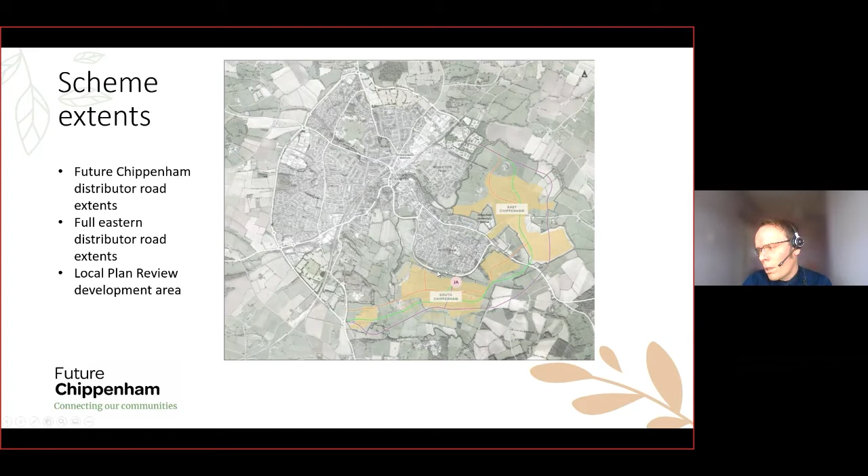The options assessment process is shown on this slide. At the first stage, during the HIF bid, we undertook an options assessment looking at ways of unlocking and enabling housing development, and the preferred option from this was the full Eastern Distributor Road.

The second stage, which we're presenting today, is the Future Chippenham Eastern Distributor Road options assessment. It takes forward 3 strategic objectives from the HIF bid: enabling housing development by unlocking land, improving traffic congestion, ensuring the transport network has capacity to accommodate housing growth, and providing good transport connectivity for sustainable transport between new and existing developments.

We've split the route options into 2 option sifts. The first option sift looked at a higher level. We reviewed the options against the strategic objectives and identified significant environmental, physical or land constraints that would make those options undeliverable.

I will present them on the next slide, but we are not consulting on the first sift options - we're consulting on the second sift options. These second sift options are presented for public consultation and are subject to a full options assessment, including a preliminary environmental assessment and option cost estimates.

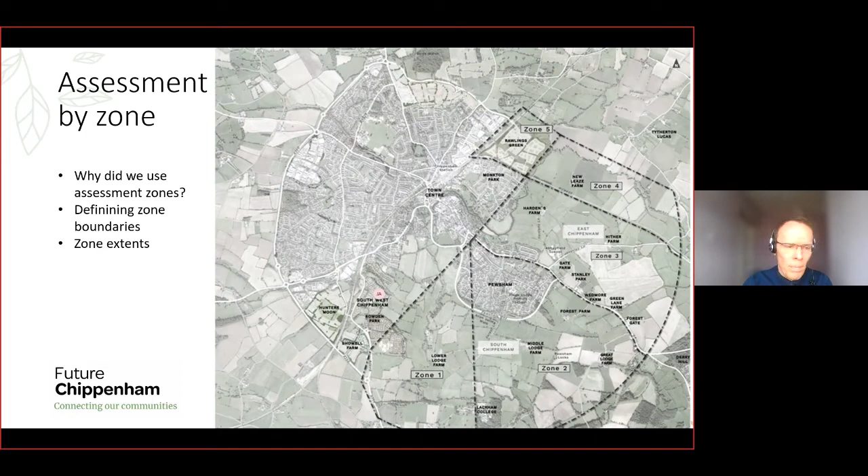Each stage of the sifting process takes forward distributor road routes within each zone, meeting the assessment criteria to pass to the next stage. We've also included options for an additional road linking to Pewsham Way that links up with the distributor road, and these are assessed separately from the zones.

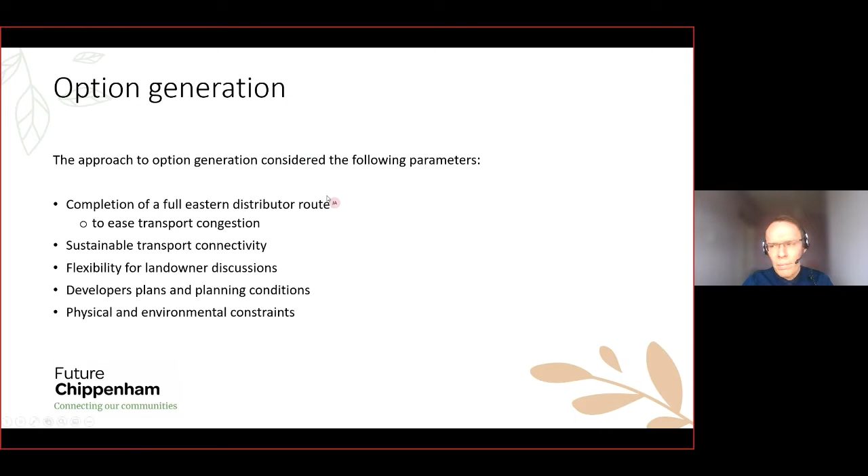So the options were generated against the following parameters: completion of a full Eastern Distributor Road route to ease transport congestion, sustainable transport connectivity, flexibility for landowner discussions, consideration of developer plans and planning conditions, and consideration of physical and environmental constraints.

So on the basis of cultural heritage, impact on the conservation area, and impact on habitat, we've discounted that option at this stage.

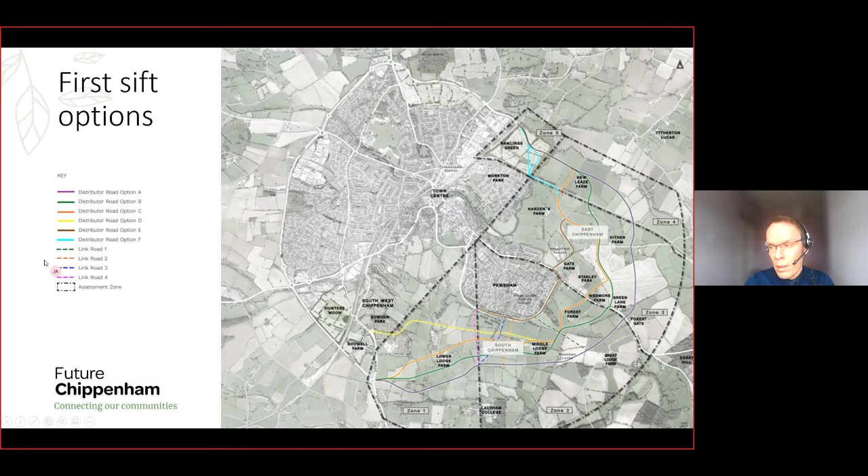Option B, the middle route, the green line on this slide, generally runs through the residential development area identified in the local plan, so it could be better integrated with the development. Option C, the inner route, similar again to option B, again integrated with the residential area. That particular one is 7.3 kilometres long, and option B is 7.4 kilometres long.

So all of the options include two significant crossings of the flood zone to the River Avon. In the south, they've got different length structures - the further out you go, so A is a longer structure than B, and B is a longer structure than C. To the north, where they cross, they actually all tie into the same structure because it needs to align with the Rawlins Green Distributor Road route.

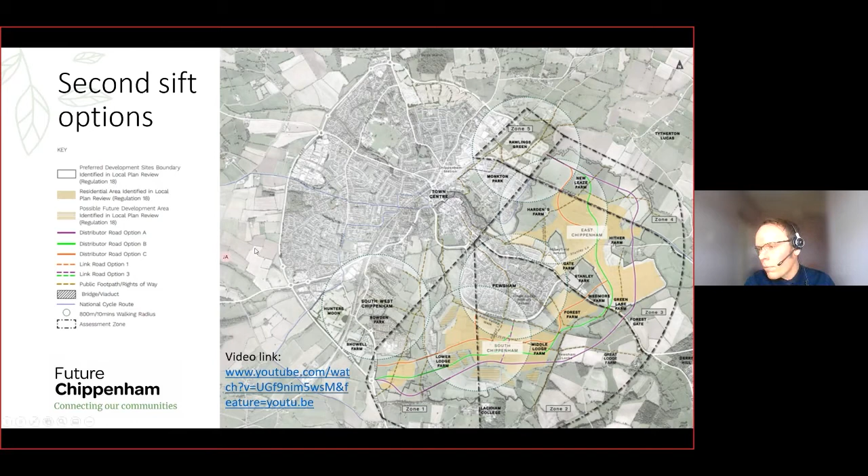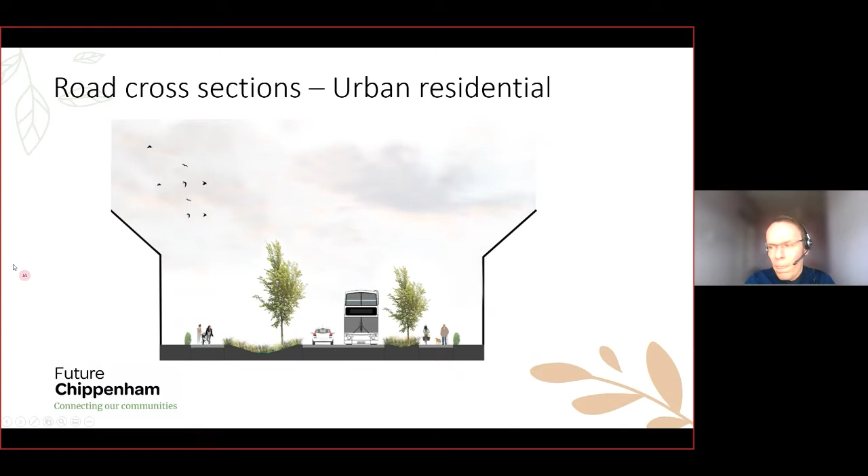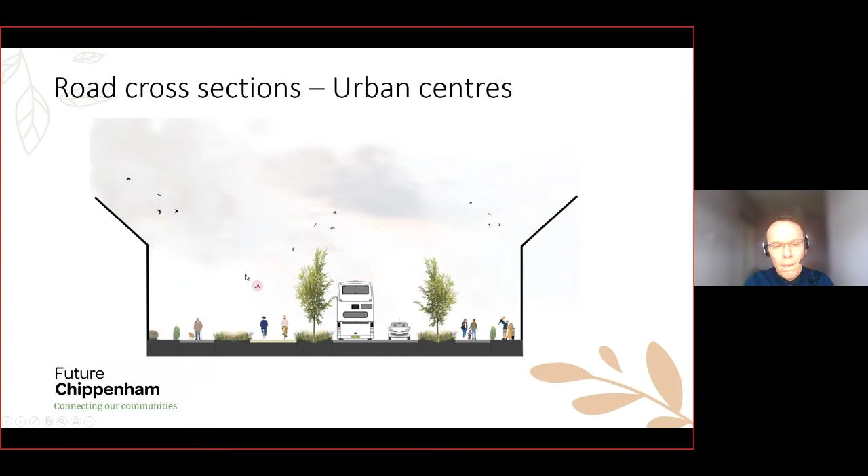So in terms of the methodology for the options assessment, we have a 4-case assessment.

So the strategic case, where we again use the strategic objectives from the HIF bid - all of the options we're presenting as part of the second SIFT for public consultation meet strategic objectives 1 and 2, so they would enable the housing quantum outlined in the HIF bid, and they would also mitigate traffic congestion. Where there is a difference in the strategic case is the connectivity objective. So each route option is geographically located in a different place in relation to existing and future developments, and indeed onwards to the town centre. So you'll see on the following slides there is a different scoring and a preferential route in terms of the strategic case on that basis.

The second case is the delivery case, and at this stage, although there are some minor differences in the score associated with letters of support from the HIF bid, there are ongoing land discussions, and those, in conjunction with the public consultation feedback, will inform an update to the delivery case prior to the summer of 2021.

The third assessment case is the environmental case, which includes a preliminary environmental options assessment, a consideration of all of the categories you would expect to take forward at the planning stage for the environmental impact assessment. The majority of this at this stage is desk-based and reviews the potential environmental impact, and the factors influencing the scoring for this are related generally to the geographical proximity of the road routes in relation to environmental features, and also the scale of the proposed road and bridge infrastructure.

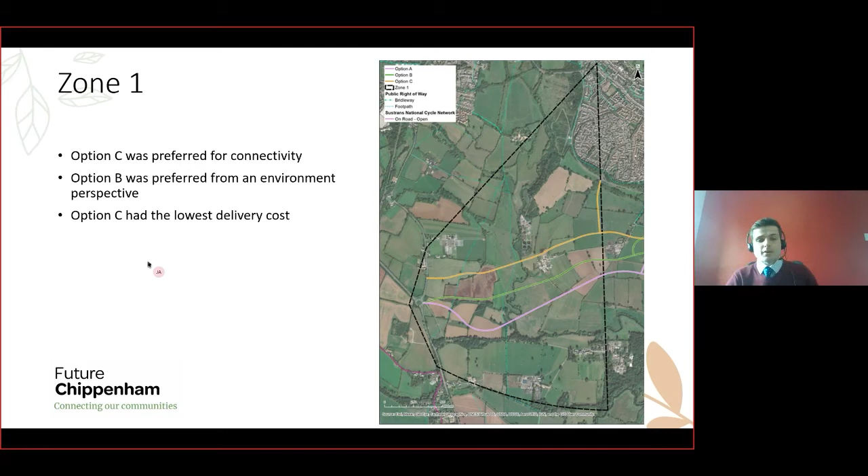So from an environment basis, just what Jamie touched on, we looked at all of the topics normally included in an environmental impact assessment at the planning stage, but noted on a slightly higher level, based mainly on desk study information. But in this zone specifically, the key factors that came into the assessment were landscape and visual effects, potential cultural heritage impacts, the carbon cost of the scheme, and also effects on the water environment.

So I guess starting with landscape, option C and option B are both aligned a lot lower in the landscape than option A, which follows a higher point to the south.

Option C does connect into a high ridge line between the sewage treatment plants, which you actually can't quite see on the plan, below Lower Lodge and above Lower Lodge. So that is more visible than option B, which when you add compensatory mitigation planting would be the most concealed and most visually unobtrusive option.

From a heritage standpoint, option B was also preferred. This is because previous archaeological investigations at Showell Farm have found some interesting archaeological finds, which would put it in slightly worse risk than option B, as well as the proximity of option C to that conservation area and the potential for it to be partially within some views from the conservation area when mitigations applied, although the majority of it would be screened.

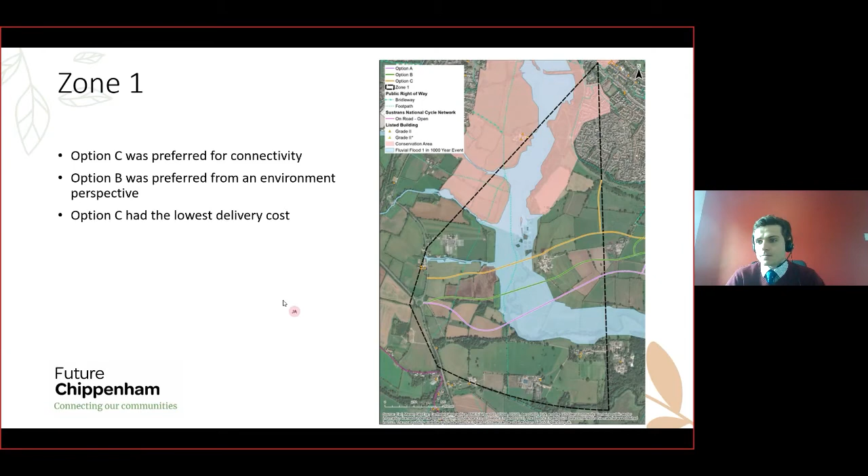So I think it's on the next slide. Okay, sorry, there was a bit of lag there while I was changing the slides.

So I think there's opportunities with all of them for connectivity, but in terms of geographical location again, which we keep coming back to, option C is closer, so it's quicker to walk to Pewsham, and the centre of Pewsham is within a 10-minute walking zone of option C. If you ride your bike, all options are probably viable to get into town from here, but option C is the best in terms of connectivity in this zone.

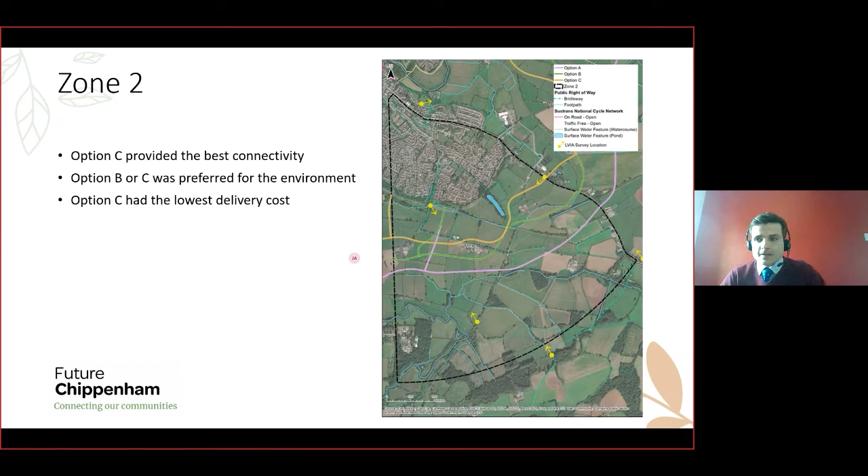So again, it's a similar story. The inner route, option C, is closer to Monkton Park via the National Cycle Network, and it also has good links down to Pewsham and into the town centre and some of the schools in the Pewsham area. Option B and A would still connect to the same public rights of way, but they are again further out. So option C is preferred.

So from an environment standpoint, one of the key assessments is landscape and visual effects. Options B and C follow the inside almost of a bowl, which allows the options to progress through the environment and existing topography without being too visible, whilst option A sits on top of and slightly to the back of the hill features.

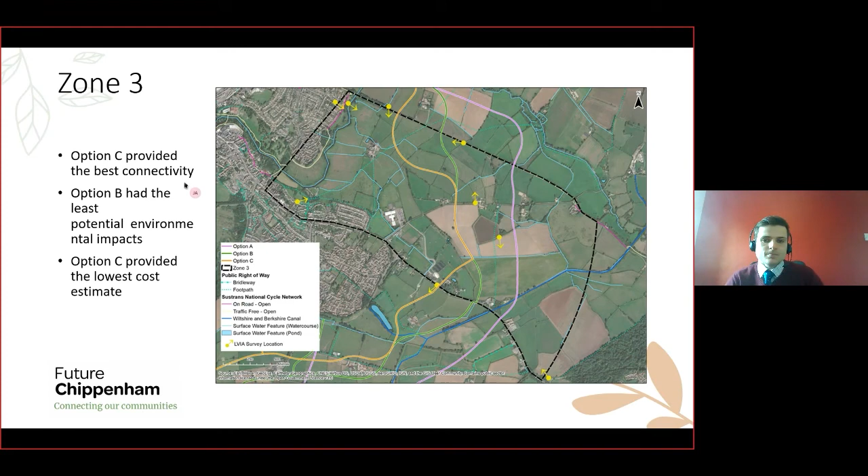In terms of scoring, a similar thing again: option C is just that bit closer to existing development, so it scores better than the other two options, but the other options do have that connection. They're just further away.

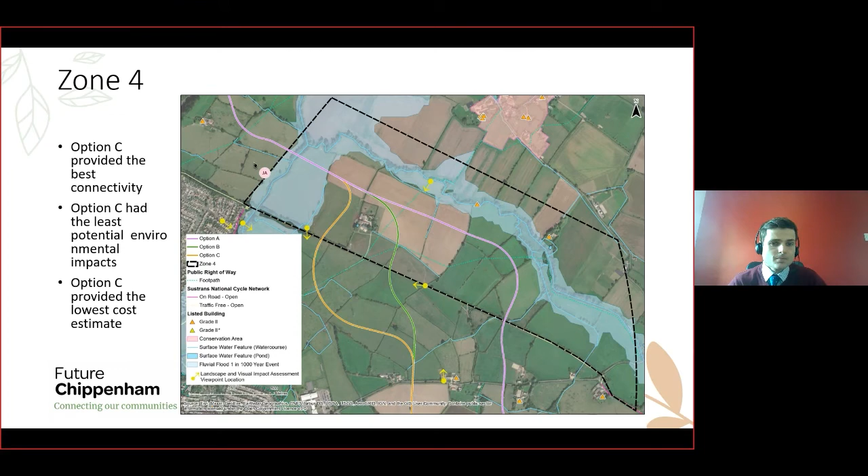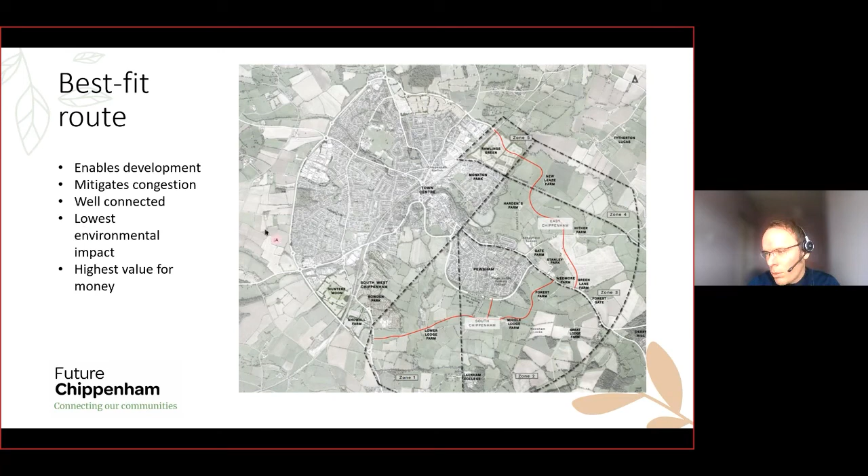In terms of next steps, we will be updating the options assessment, considering the analysis of the public consultation, landowner discussions, supply chain marketing, environmental field surveys rather than just desktop, and a flood modelling exercise. We'll then update the cost estimates and announce the preferred route in the summer of 2021. That's myself and Tom covered for the options assessment for now.